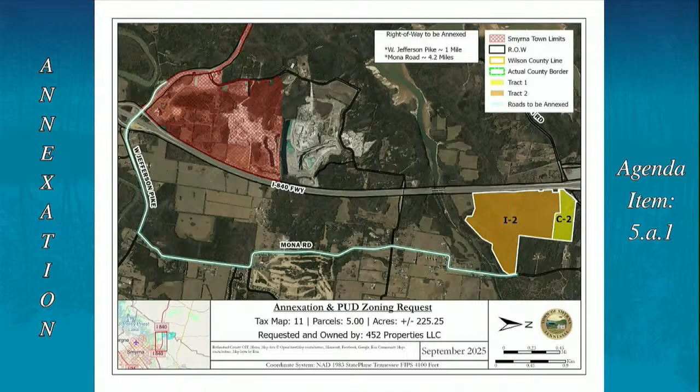Through discussions, they have said that if the town chooses to annex the road, then it would be transferred to us as well, so that grant will still remain in place. At this time, it's slated that construction would begin in fall of 2028, so it's about 3 years out before that would be done. That's what TDOT is planning, through the grant.

We did provide estimates for street lighting, a little over $17,000 a year as an annual cost once we put those in, to provide lighting on the streets that would be annexed. We're not anticipating any expenditures for parks since there's no residences here or proposed.

I did include, just for everyone's information, what the projected costs are from CUD. It's a pretty substantial amount of dollars, north of $30 million for water main installation and tanks and that sort of stuff for improvements there. And then approximately $10 million in construction costs to extend the necessary sewer mains and lift station for sewer costs, as well as a little over $400,000 in easement acquisition cost.

In the discussion of the agreement, the town would acquire the easements, but the developer would have all costs for construction of the main and everything.

We did look at revenues, and I basically used current tax values for this. As far as property tax values, obviously if they develop, the values would go up, but at current tax values is what I included. It also provided an estimate on the impact fees based on the proposed maximum square footages that were included, which translates to about $8.5 million roughly in road impact fees and about $2 million in public safety impact fees at full build out, at current rates. That would obviously be realized over many years, since this is a multi-year project, not something that would happen immediately.

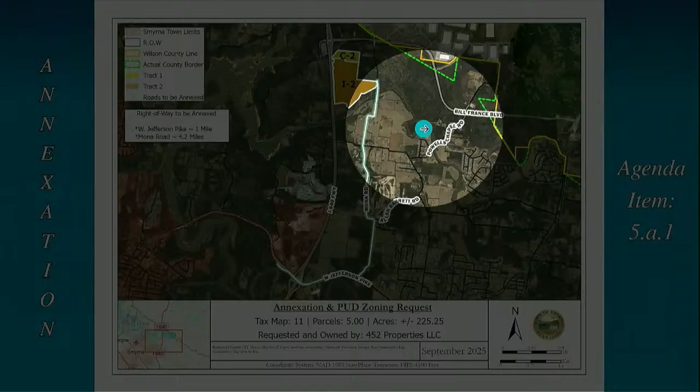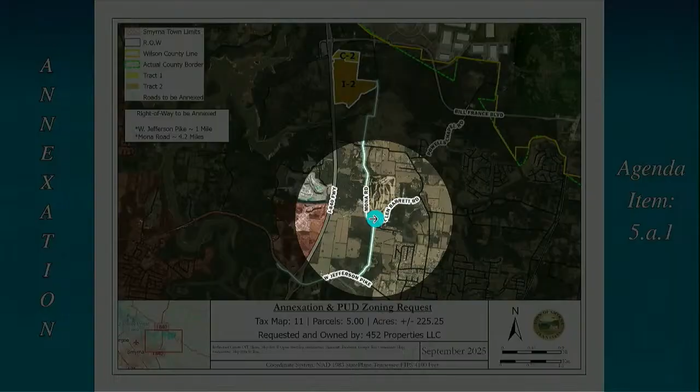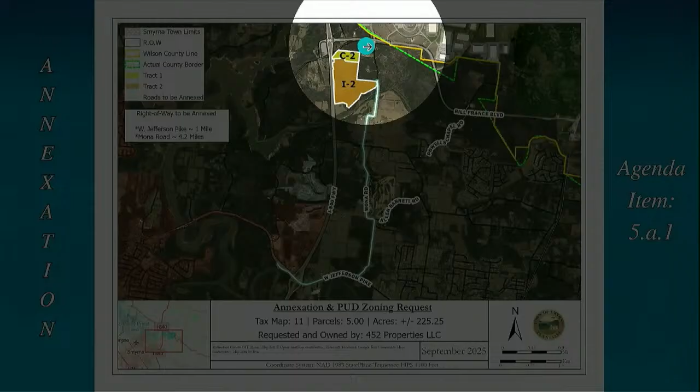So between that location and this current request, that's all still county. Yes. And to annex that piece, that's one of those we kind of costed out separately. To annex that area, you'd have to get Powells Chapel, you'd have to annex from Mona Road, down Allen Barrett Road, and then up Powells Chapel to get to that area. The simple way would be to come down Bill France Boulevard, but it crosses the county line, so we can't do that.

Is this or is this not a part of our growth boundary? It is a part of our urban growth boundary, the portion of it that is within Rutherford County at least. Some of these parcels extend over that county boundary, or where everyone believes the county boundary to be, and part of it is outside of our urban growth boundary and actually in Murfreesboro's urban growth boundary. The extreme eastern portion of this that's not included in any of these requests, but I think they've pretty much stated they have no intentions of serving this area.

That is correct, yes. That's the same as Wilson County, Lebanon as well, right? I don't know, we've had some contact from folks in Wilson County, I know there's been some discussion. I think they've already had that industrial development there. I think Lebanon, Wilson County is trying to push, at least Wilson County, I shouldn't speak for Lebanon. What Wilson County folks have told me is they are trying to push the industrial development to this area because that's where they want it. They've had some issues in other parts of their county with requests that became pretty controversial, and they're trying to push most of the industrial development, at least in Wilson County, to this area.

Hey Kevin, from Jefferson Pike up to the proposed I-2 on Mona Road, what's that currently zoned? Most of that is zoned RM in the county. I think some of the area along the interchange, the county has some additional zoning. On the south side of Jefferson Pike there's some different zoning there, some sort of industrial type zoning, I believe. I don't know that anything on the north side of Jefferson has anything other than RM.

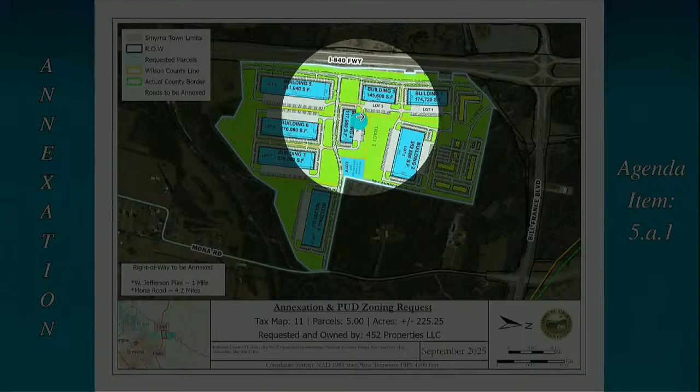This is Mona Road, kind of at the bottom on this map. There'd be this roadway here, it comes north, and here's the north-south roadway I mentioned. So they've looked at that to try to make it as difficult as possible for people to make a right turn out of there.

So they're doing what they can at this point to keep people from using that road for industrial traffic.

So that would also keep it redirected away from Powell's Chapel Road, if you're using the non-turn anyway. It would not be directed primarily, it would be this tract. For future tracts, if that ever comes in, we'd have to look at that separately to keep them utilizing Bill France.

The concern we've had, because we've seen it in other places in town, is sometimes if a driver hasn't been here before, he goes wherever GPS tells him to go, and we've had issues there in the past in other locations, like Florence Road. Florence Road is exactly what I'm talking about.

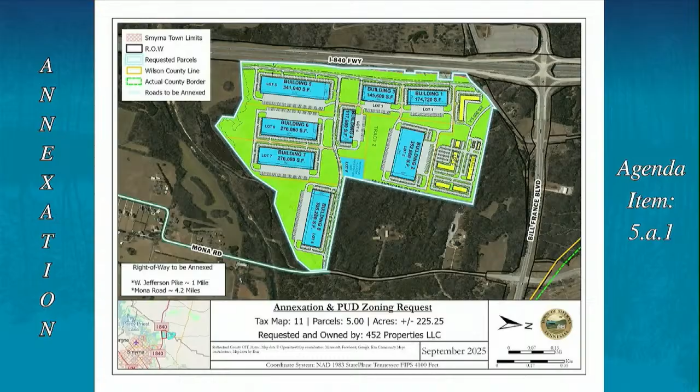That's the only concern I have - once they're there, I think they can talk to the people, they're going to make it hard to turn right anyway getting out, they would go back. My concern would be coming in, but I don't know if there's anything we or the developer could do to prevent that, really.

So this is about 40% of what was before us before? Roughly, maybe a little less than 40, because the other tract is almost 600 acres of what's left. This is about 225 or so.

And is this a financially viable project? Financially viable for the town or for the developer? For both. I think it's a stretch for sure. Let's do this - Dave, I hate to put you on the spot, but I think you could probably address Charles's question concerning the town's position on viability.

Good evening, Dave Santucci, Town Manager. We've been trying to work with the developer on making this as financially viable for the town as possible. There may be some things that this commission and the town council have in terms of ideas that we haven't thought of yet. We're happy to review those as you look through the utility agreement, because at the core, the utility agreement really is the main crux of this. If you don't have sewer, you don't have a project, right?

Charles, to your point, with those sleeves under 840 and utilities going in, I would be surprised if it didn't develop sooner rather than later. Honestly, the expense this developer is looking to lay out to get sewer and utilities to their property, there's probably not a lot of developers that would be willing to take that on. So there's probably quite a few folks watching to see when it's going to be there, so they can take advantage of it as well, I'm assuming.

May I ask Paul another question? I understand another voice in the room are the county citizens that live in and around the area. In regards to this specific west area, how have the conversations been with the community out there? Have there been agreements made outside of anything we're seeing today regarding the development? Sure, appreciate the question.

As Dave mentioned earlier, in our pursuit of zoning in the county, like we would normally do with any project of this size, there's a good level of community engagement and involvement. Up to this point, we've hosted three neighborhood meetings, and had a number of individual conversations with folks in this area. As it relates specifically to this western tract, we haven't received any comments or concerns specifically to this tract. The eastern tract still has some work to be done to make sure we're being good neighbors as far as layout of buildings, setbacks, and buffers, and we'll continue to work on that. But for this western piece, we haven't received any concerns yet.

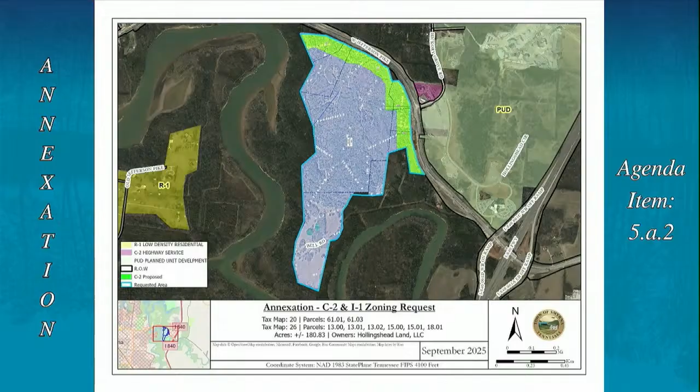On the most recent concept plan, there's a parcel not part of this request that they show a little development on, crossing into it, so they'll have to amend their plan to take that out. But that's just a concept plan—this is not a PUD, just a C2 and I1 request, so they'll need to tweak that when it comes back to us.

This is the one just mentioned where they're proposing a greenway as part of their development, primarily on the Corps property that completely surrounds this project, but somewhat on their side as well, a little bit.

Again, it's still an annexation, and all services would be provided by the town on this one. You've already had the public hearing and voted on that, but nothing's changed since you looked at it before. I think that's all I got.

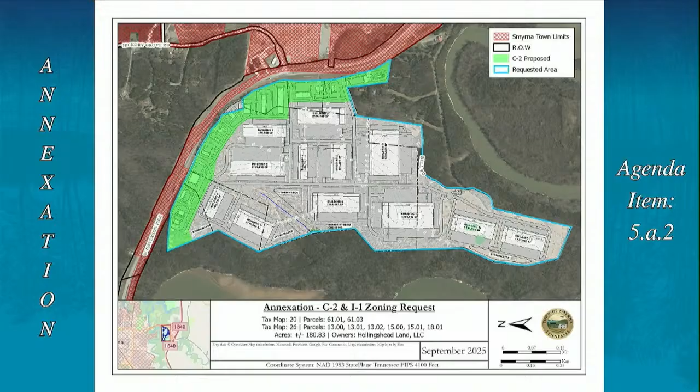As I recall at the commission meeting, Steve asked for additional commercial, and from viewing the council meeting, I saw that was expanded—even beyond what that was. From a council perspective, that's what you guys asked for, correct? Yeah, we just added commercial, and that's what this is doing. Okay, just accepted it.

Questions for Kevin or staff on this?

Move to approve staff comments. Do we have a motion? 52 lots, 21.04 acres. It is part of the Hidden Springs PRD. We had a few comments, most of them standard comments regarding signage. 52 lots, 21 point—and number 7 is a comment from CUD.

Comment number 6 regards the addition of a temporary turnaround at the northern end of Belton Way. They have shown that, so that has been taken care of and can be removed.

So with those remaining comments, as a comment from CUD, number 6 regarding the addition of a temporary turnaround at the northern end of Belton Way—they have shown that, so that has been taken care of and can be removed.

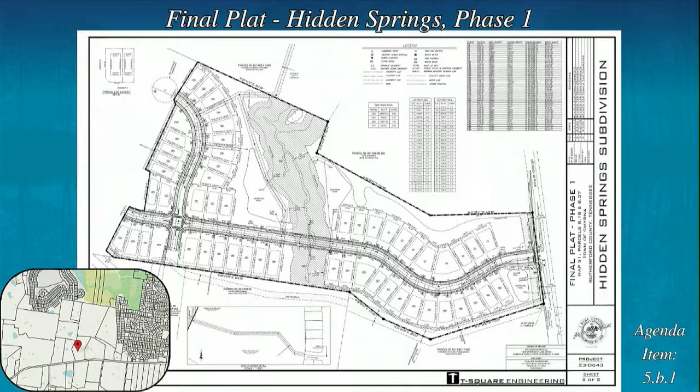With those remaining comments, it's been a long, arduous process. I'm glad to see it coming to a final plat. I do want to applaud the developer as well as the homeowners for staying with it and continuing to work through issues. At times it was easy and at times it was not.

All those in favor of approving this motion, please signify by saying aye. Aye. Opposed? This motion is approved.

Next, we are on to site plans.

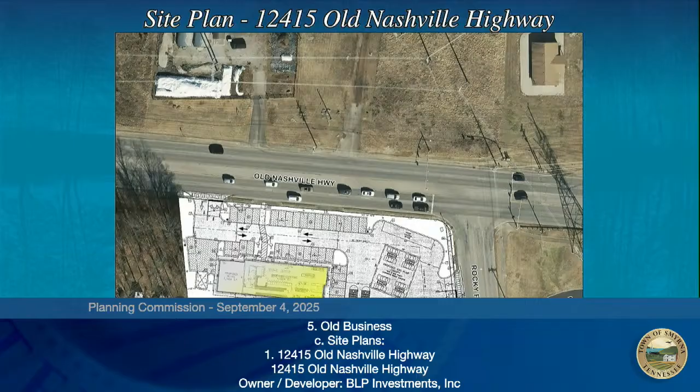The applicant is proposing about 10,000 square feet, meeting that requirement. Parking required is 45 spaces, and they're showing 47, which includes the 2 handicap parking spaces required, which they are showing.

Number 4: electric transformers, utility pads, water meters, gas meters, and electric meters are required to be screened from public view. It's in that area—right here, if I can get my pointer—yep, right in that little area there.

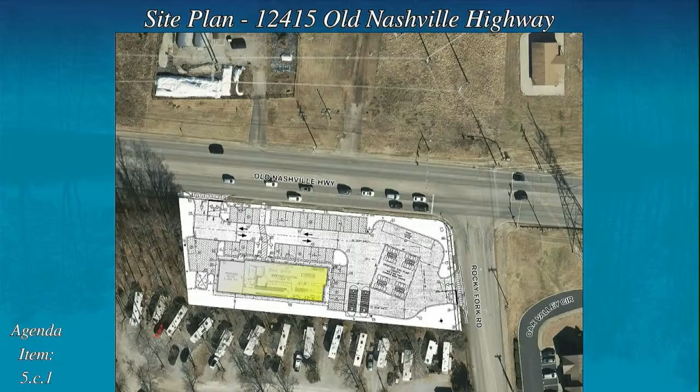So the waivers they requested are for the sidewalk, the foundation, and foliage or planting. What else? That's it, those are the two.

Thought there was something related to the canopy. No, elevations are all good at this time, for staff level at least. We can still work on some things like the rear elevation, but it was not a waiver per se.

The canopy elevations and the main building elevations were using different colors of brick and whatever, and we asked them to match it, and that's what they've got fixed, so that's not an issue. So all elevations meet design review?

It meets design review. The rear elevations are something we felt like there could be some work done on, because they're supposed to kind of break it up, add some awnings or windows or something, rather than just have a blank wall. That's staff's recommendation as far as the design goes.

Right, correct. If you don't like what they've done now, what would you be asking them to do? That's what I said, we looked at it - basically they kind of just put the thin columns in. Again, kind of breaking it up more, widen those columns out, add some awnings over your back doors, create some depth, maybe with some windows or some things like that. Well, I mean, I know by zone it's that, but-

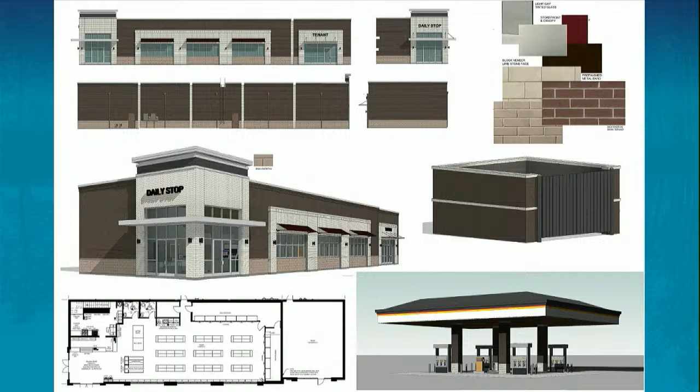There's some good examples in other communities around us of what we were thinking, that we would be happy to meet with them to talk about directly if they have questions. There's some good examples of what we're talking about in other communities around us that have had overlays longer than we have, that we would be happy to meet with the developer and the engineer about, kind of give them some pictures of what we're talking about, not just verbal. And this falls within the overlay, right? Correct. I'm just concerned about doing a lot of waivers in lieu of, especially if it's in an overlay area.

Could you go through the sidewalk one more time? Yeah, so the sidewalk, the overlay requires 7 feet. To help with that, due to the width and depth of the site, they are showing wheel stops to prevent the vehicle from overhanging onto that sidewalk, to get it back off the sidewalk so you don't have pedestrians walking in the middle of it.

So are we staying at 5 feet or 7 feet on the sidewalk? It's 5 feet still, I believe. It would be a 5-foot sidewalk. The idea behind it is you want to have at least 5 foot. If you don't have the wheel stops, you have the vehicles overhanging the sidewalk a couple feet. You want at least 5 feet for ADA access along the sidewalk.

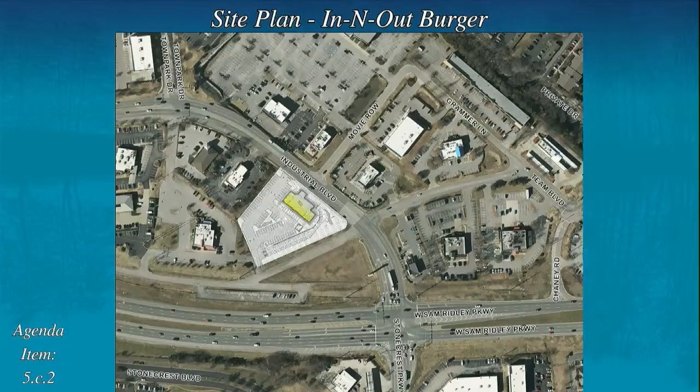We talked with In-N-Out about it, and asked them to bring forth some ideas on some solutions - and that was some of the recommendations that they made. We reviewed those, and we feel like it would be best if we look at it globally, because we think those improvements probably do help them, but not necessarily everybody, so we want to be sure it affects - we look at something that helps everyone.

Okay, and so that's why we wanted to get kind of an independent look. Yeah, when I looked through that, I just saw there were quite a few different options - some of them were right turns only, some of them were medians, some of them were not many changes at all. So I wasn't real sure what the intent there was - several ideas, yeah, and I was like, some of these might help, and some of these might not do a thing, right? And that's, again, why we wanted to make sure that we looked at it.

We want to make sure, and naturally they're looking at their site, we want to look at the whole area and make sure it works for everyone in that area, not just their site.

So we passed the current design review about 2 years ago, is that right, Kevin? I went back and looked because I couldn't remember myself. It was a little over 4 years ago, June of '21. Since we passed that, along the Sam Davis corridor, and Sam Ridley corridor, we have not wavered on the requirements.

No, we've required 75%. So all of those restaurants, McDonald's, Redstone Financial, Cane's, Whataburger, Andy's, Sprouts that just got approved last month, Stewart's Landing Design, all of those City required brick, all of those meet that. That's correct.

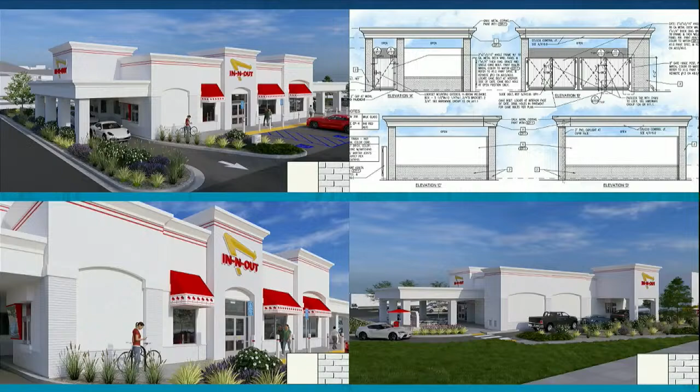It's not my project, but I can pull a picture up if you want to look at it. Honestly, in my opinion, I went and looked at the Murfreesboro store. I actually got out and walked around the site, tried to be objective and asked, is there enough brick? Does it look okay? The building looks fine, but to me it doesn't look like much of a difference to just run the brick all the way to the roof and make it a brick building. It's all white, it still would be all white. It doesn't change your awning, your brand, your logo. I've heard that it's branding, but that's really not part of your logo and your stripes, and the look of the building really doesn't change significantly whether it's EIFS or brick.

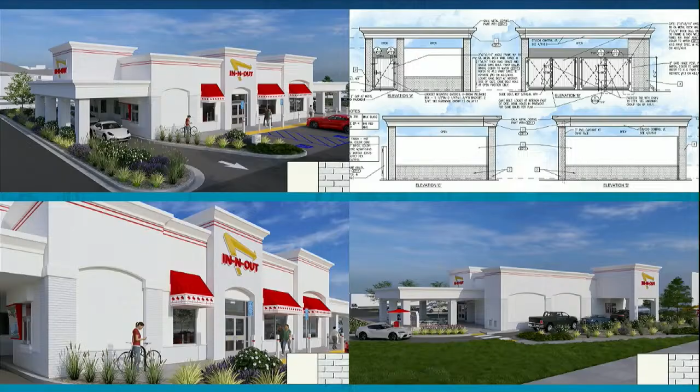It's not only the look, it's also the maintenance. Brick's harder to maintain than EIFS? Yes, compared to the stucco for our painting. We go through and do as much in-house as possible. We have a painting team, a maintenance team, a repair team, and everything along those lines. If we do any patches or repairs, we go through and paint corner to corner so that you'll never see a patch in any of our buildings. Stucco maintenance is something that's very important to us.

You can go to any In-N-Out and it stands above the rest for how well it's maintained, whether it's curb appeal, aesthetics, or landscaping, which is significantly more. Kevin mentioned we're 4 or 5 times the minimum requirements for landscaping. It's really important for us to have a beautiful building and facility and overall customer experience. So we repaint our buildings every 3 to 5 years. We're proposing EIFS as opposed to 3-coat stucco because of the temperature and weather over here. In freeze-thaw conditions, 3-coat stucco would not be appropriate compared to EIFS. So what about just brick?

It's not an aesthetic that we do for our buildings, just branding and painting them white. It's the same process, right? Just paint brick.

Is this a site build? You're not bringing this in as walls, or are you? No, I don't want to say kit, but we're building from the ground up.

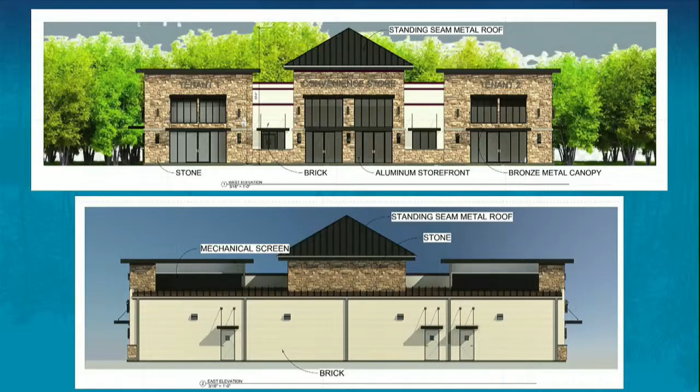So, not to be difficult, but how do we have lights on Enon Springs that shine facing the road if it can't leave the property? I don't understand the difference. Well, what he's talking about is primarily when it's abutting residential. Shine, they can't shine out onto residential. Okay.

You made a comment that you were concerned about blocking the road when they were dumping the dumpster. Was that part of the discussion, and have you developed a workaround there, or where are we at?

So we've got two dumpsters going on here. The first dumpster, mainly the one this comment is regarding, is the one shown on their site that was there, installed by the townhome developer. That one is facing Broadleaf, which after this all gets developed out is probably going to be a busier road. Albeit it's probably a minimal time in which dumpsters get unloaded, there should be times when it's probably going to be occupied by a dumpster truck doing offload and unload.

So really that is what that was in reference to, but you also have the proximity to the townhomes -- noise, odor, anything of that nature caused by a dumpster. And that's the townhomes, but it's still on their tract as well -- this commercial tract is where it is located.

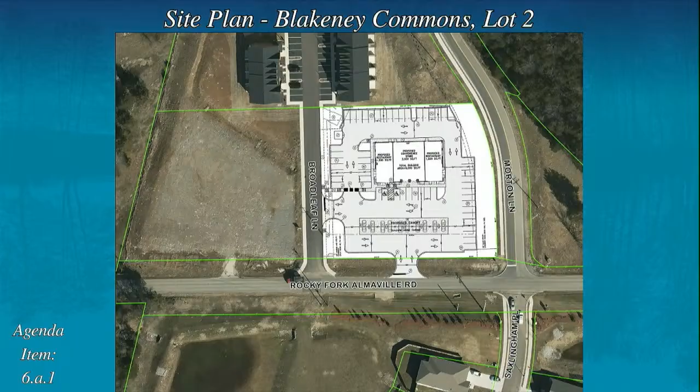Anything else from staff? Can somebody order pizza?

I have nothing more, I'll entertain a motion. Motion to approve with staff comments. Do I have a second? Second. Further discussion? All those in favor of approving this motion, please signify by saying aye. Aye. Opposed? This motion is approved.

We're now on to item 7, subdivision regulations amendment, section 7-101.2, and addition of appendix A.

This is what we discussed under the public hearing already. We're adding the ability for a third form of surety, a form as approved by the town attorney, and we added an appendix that provides a letter of credit example for everyone. So we recommend this to you.

Questions for staff concerning this amendment? We have to approve staff comments. A motion to approve with staff comments. Do I have a second? Second. Motion and a second. Further discussion? All those in favor of this motion, please signify by saying aye. Aye. Opposed? This motion is approved.

Next we have a zoning ordinance amendment, Article 4, Article 5, regarding minimum building setbacks for accessory structures.